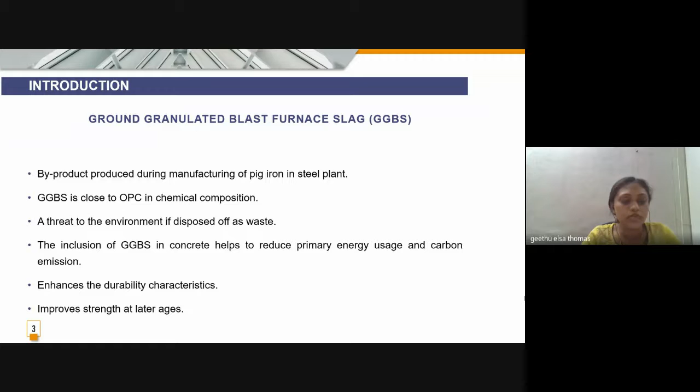It also enhances the durability characteristics, and it is found that it improves the strength at later ages.

Impact resistance is the ability of a material to withstand a high magnitude of force or shock applied to it over a short period of time. A force of larger magnitude over a short time has a greater effect than a force of smaller magnitude over a longer period of time.

Impact strength acts as a critical part in structures like bridges, harbors, crash barriers, fencing posts, curbs, etc. That is, areas which are prone to road accidents, also structures at the danger of blast loading or natural disasters.

Need for study: cement enterprises are one of the fundamental drivers of global warming, as they are the principal donors of carbon dioxide. It is the need of the hour to adopt a material that reduces the carbon emission and consumes less energy during production.

Usage of GGBS in conventional construction practices helps to reduce carbon dioxide emission, and it is also an effective utilization of industrial byproduct.

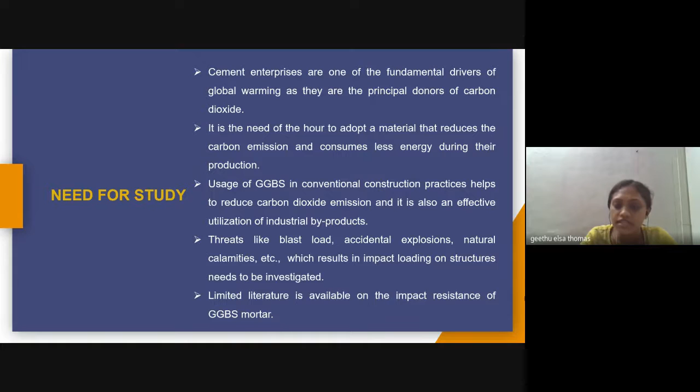Threats like blast loads, accidental explosions, natural calamities, etc., which result in impact loading on structures, need to be investigated. Limited literature is available on the impact resistance of GGBS mortar.

Objective: to identify the effect of addition of GGBS in improving the impact resistance in mortar mixes, to study the properties of materials and arrive at a suitable mix proportion, to identify an optimum mix, and to identify the microstructure of GGBS in mortar by conducting SEM analysis.

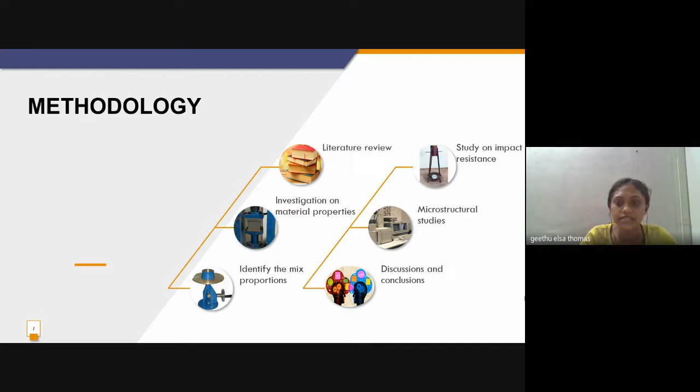Methodology: literature review, investigation on material properties, identify the mix proportions, study on impact resistance, microstructural studies, and discussions and conclusions. Material properties: cement, 53 grade ordinary Portland cement is used.

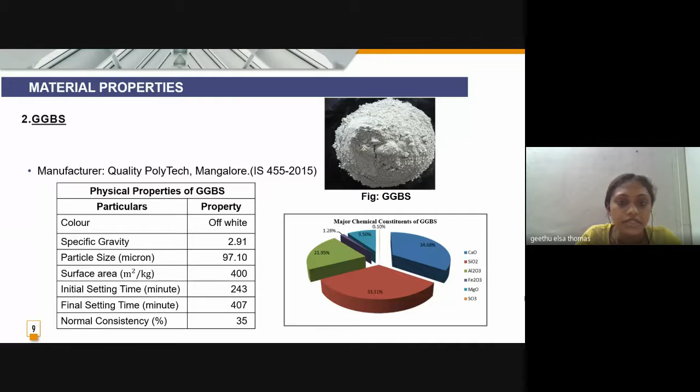The properties are tested and tabulated, and the chemical composition is shown in the figure. GGBS is bought from Quality Polytech Mangalore, and the properties as supplied by the supplier are shown here, and its composition is depicted. Then fine aggregate is used, M sand, which is collected from a local quarry in Calicut.

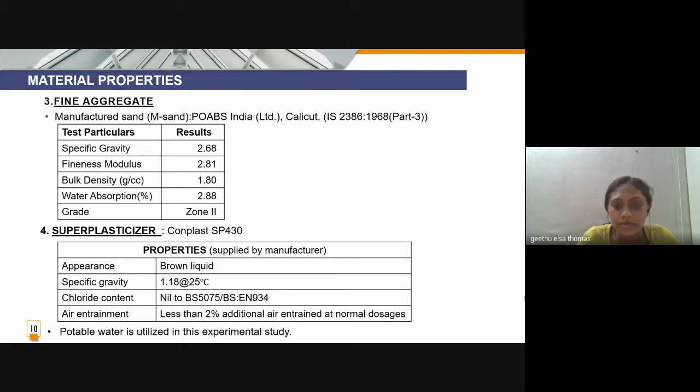The properties are tested in the lab, and it is found that it conforms to grade of zone 2. Then superplasticizer, Conplast SP430, is used in this study, and its properties as supplied by the manufacturer are tabulated. Also, potable water is utilized in this experimental study.

Mix proportions: guidelines for the preparation of mortar are according to IS 2250-1981. Proportioning is done using trial and error method depending on the parameters, namely amount and properties of binding materials, concentration of superplasticizer, and flow value.

A mix proportion of 1:1.5 is taken for this study, which is approximately equal to M20 grade that can be conventionally used as per the recommendations of IS 456-2000. A water cement ratio of 0.35 and superplasticizer content as 0.5% of binder is taken.

In this investigation, the cement was replaced with 20%, 30%, 40%, 50%, 60%, and 70% GGBS on a mass for mass basis. The amount of fine aggregate, water cement ratio, and superplasticizer were kept constant in all the mixes.

The table shows the notations for various proportions of the mix. For 0% GGBS, that is the reference specimen, it is depicted as OPC. Then for 20% replacement of cement it is depicted as G20. Similarly, for 30%, 40%, 50%, 60%, and 70% replacement, they are depicted as G30, G40, G50, G60, and G70 respectively.

Fresh properties like consistency, setting time, and workability are studied, and the results are tabulated. It is observed that consistency increases as percentage of GGBS content increases. Addition of GGBS does not significantly affect the setting mechanism. Workability increases as percentage of GGBS content increases.

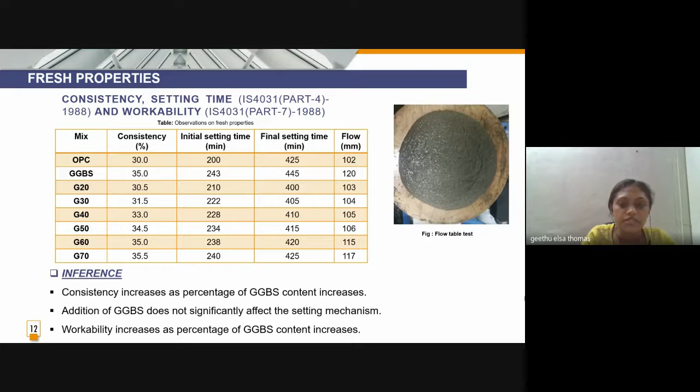A study on hardened properties is done to better understand the mechanical behavior of mortar after the inclusion of GGBS. Compressive strength tests, split tensile strength, and flexural tests are carried out on mortar, which are cured for 28 days in water. The results are tabulated.

It is observed that the result of the 28-day compressive strength test shows that addition of GGBS up to 50% provides strength almost equal to the OPC mix. Also, in general, there is a significant improvement in the flexural strength and split tensile strength with the addition of GGBS up to 50%, and it reduces thereafter.

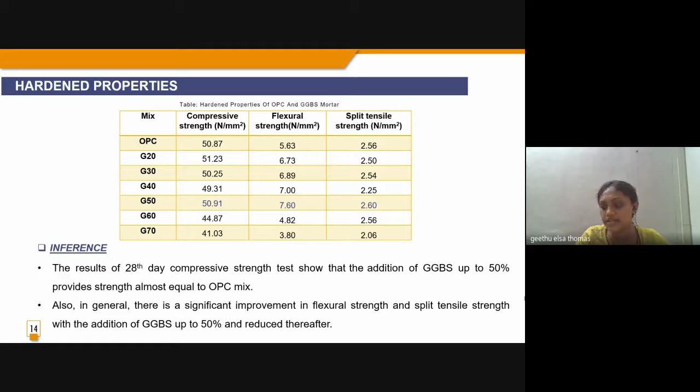This may be due to, from literature, the presence of unreacted GGBS acting as a filler material in the paste. Then, study on impact resistance.

Usually large scale missile impact tests are technically difficult and very costly. So we are focusing on small scale drop weight impact tests, which are done according to ACI recommendation 544.

It consists of a load of 4 kg, which is dropped from a height of 457 mm, making an impact energy of 17.93 joules per hit. Impact energy is determined using the equation E = N x m x g x h, where N is the number of blows at failure, m is the mass of the steel ball used, g is acceleration due to gravity, and h is the free fall height.

The number of blows causing the first crack and the number of blows at failure is taken from the test, and the results are tabulated.

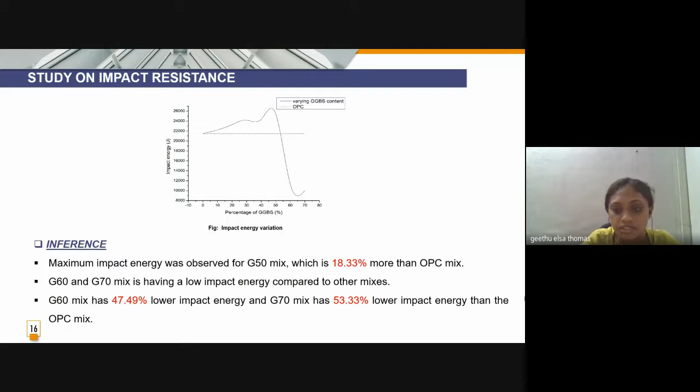G60 and G70 mixes have lower impact energy compared to other mixes. G60 mix has 47.49% lower impact energy, and G70 mix has 53.33% lower impact energy than the OPC mix.

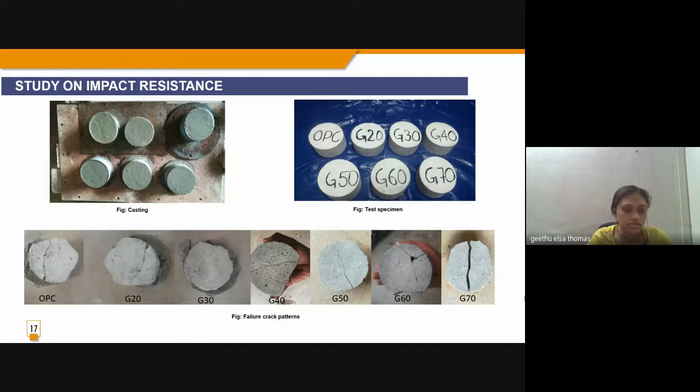These figures show the failure crack patterns. A brittle failure is found from the surface of the specimen, which breaks into two halves.

For microstructural studies, scanning electron microscopy technique is used, done according to ASTM C1723-16. The facility at STIC CUSAT, Kerala, is used to study the morphology of OPC mortar mix and G50 mortar mix. The specimens, after 28 days curing, are taken for SEM analysis.

These are the images obtained for the OPC mix and the G50 mix respectively. Here the notation A denotes the pores, B denotes unreacted or partially reacted slag, C denotes the smooth surfaces, and D denotes the air voids.

It is observed that the SEM image for the G50 mix shows more smooth surfaces, indicating the fineness of GGBS, while more pores are identified in the OPC mix. Thus, the finer GGBS particles combine with the greater cement particles, enhancing the mechanical properties of the mortar.

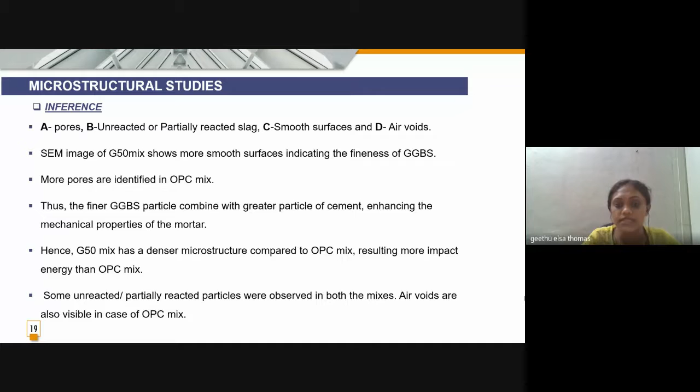The G50 mix has a denser microstructure compared to the OPC mix, resulting in more impact energy than the OPC mix. Some unreacted, partially reacted particles were also observed in both mixes, and air voids are also visible in the case of the OPC mix.

Conclusions: this study is an experimental investigation on the impact resistance of GGBS mortar. Studies on the impact resistance of GGBS mortar show that GGBS can be effectively utilized as a raw material in structures like railway sleepers, crash barriers, fencing posts, curbs, etc., which are mostly subjected to impact loadings.

From the test results, the following conclusions are made: the inclusion of GGBS in mortar improves the mechanical properties significantly. The inclusion of GGBS up to 50% improves the impact energy by 18.33% when compared to OPC mortar.

SEM analysis shows that the G50 mix has a less porous structure and more smooth surfaces, indicating a denser microstructure. The studies on the hardened properties indicate that the G50 mix can be taken as the optimum mix.

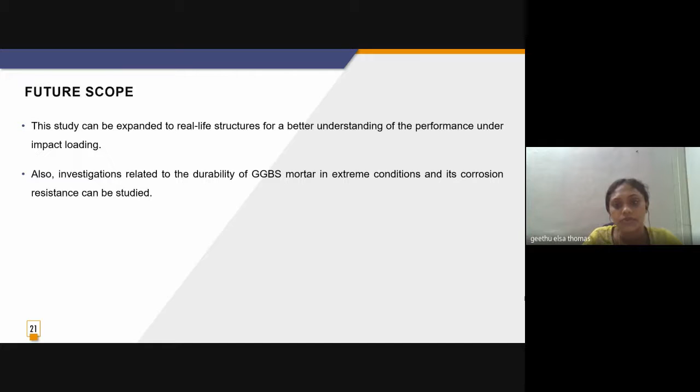Future scope: this study can be expanded to real-life structures for a better understanding of performance under impact loading. Also, investigation related to the durability of GGBS mortar in extreme conditions and its corrosion resistance can be studied.

Coming to the introduction part - if we talk about Portland cement, the manufacturing process of Portland cement requires about 1400 to 1500 degrees Celsius temperature. With this amount of temperature and this manufacturing process, a lot of harmful gases are emitted into the environment, which leads to degradation of the environment.

Whereas if we talk about low-grade limestone, it needs only 900 degrees Celsius of temperature for its calcination. With this temperature, low-grade limestone attains the pozzolanic property, and also with this temperature we can have lesser emission of harmful gases. So low-grade limestone is the alternate in the cement industry, which should be used as an SCM.

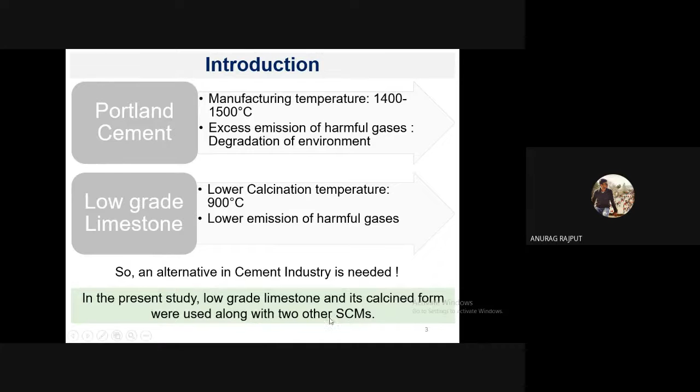So in my present research work, I have used the low-grade limestone and its calcined form, along with two other SCMs - silica fume and fly ash. Then, what is the need of this study? Actually, we can have our limestone from the waste.

What are the objectives of this research work? The main objective is to produce low-grade calcined limestone by heating the uncalcined limestone at a temperature of about 900 degrees Celsius for about 1 hour, and to determine the optimum dosage of these two, uncalcined and calcined limestone, which can enhance the properties of mortar. We also have to use it to the maximum so that...

...open landfill dumping should be minimized. We have to compare the properties of control mortar with the composite cement mortar. After all these things, we can arrive at a final mix of mortar which can enhance all the properties.

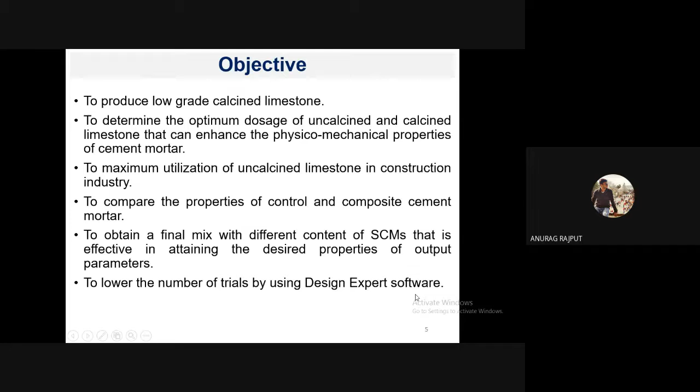By the use of Design Expert software, we have reduced the number of experiments, because we have 5 input variables: calcined limestone, fly ash, uncalcined limestone, silica fume, and super plasticizer. If we make a combination, we can have 243 mixes, but with the help of Design Expert software, we reduced these mixes to 46. So the number of trials is reduced.

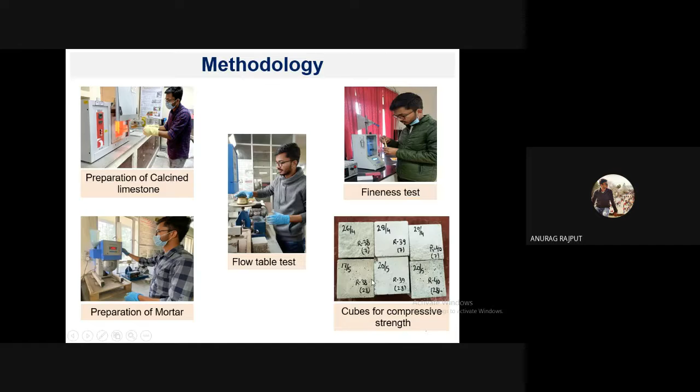Coming to the results and discussion part, first of all, these are the SCMs that I used: FA stands for fly ash, UCLS stands for uncalcined limestone, CLS stands for calcined limestone, and SF stands for silica fume. The replacement levels of these input variables are as follows.

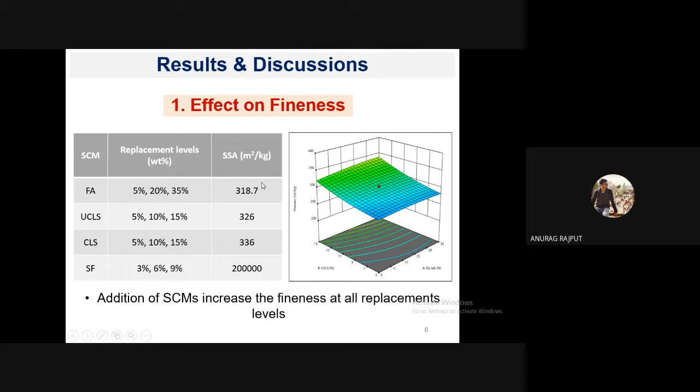I conducted a fineness test, and these are the fineness values of each SCM. I concluded that with the use of these SCMs, the fineness of the composite cement was increased, because the fineness of all the SCMs is very high as compared to OPC. So the resultant effect is increased fineness.

If we talk about consistency, all the SCMs increase the consistency. For silica fume and calcined limestone, at every replacement level, the consistency was increased. But for fly ash, uncalcined limestone, and super plasticizer, only a dosage of 5% fly ash, 5% uncalcined limestone, and 0.5% super plasticizer results in increased consistency. If we increase the dosage of these input variables further, consistency declines. So these are the only dosages which can enhance the consistency.

If we talk about setting time, it is increased with the inclusion of these dosages: 35% fly ash, 5% uncalcined limestone, 15% calcined limestone, 6% silica fume, and 0.5% super plasticizer, which leads to a retardation of setting time by about 30% as compared to the control mortar. And if we need acceleration in setting time, for areas where we want the mortar to set quickly, then these are the dosages of the input variables required.

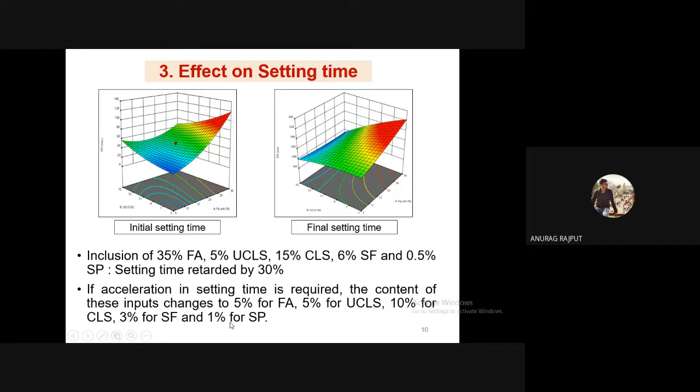We can reduce the fly ash to 5%, and uncalcined limestone is at the same level, 5%, and calcined limestone reduced to 10%, silica fume reduced to 3%, and SP increased to 1%. So this is the replacement level if we want acceleration of the setting time.

If we talk about compressive strength, we know that with the addition of fly ash, 28 day compressive strength decreases. So a very lower level of fly ash was used here, with uncalcined limestone at 5%, and 15% of calcined limestone—this is the maximum usage of calcined limestone we have used—along with 9% silica fume and 0.5% superplasticizer, increasing the 28 day compressive strength by about 62% as compared to control mortar.

And this is the mix by which we can reduce the clinker factor to 0.66, which is effective. So we have reduced the clinker factor using this mixture.

After that, I optimized the process. So these are the input variables.

Lower limit was fly ash at 5% and upper limit was 35%. Similarly for uncalcined limestone, lower limit of 5% and upper limit of 15%. Same for calcined limestone. Silica fume had a lower limit of 3% and upper limit of 9%. SP had a lower limit of 0.5% and upper limit of 1.5%.

So we optimized these outputs. We want fineness in the range of 300 to 500, consistency in the range of 30 to 36, initial setting time in the range of 30 to 120, final setting time in the range of 200 to 600 minutes, and 28 day compressive strength in the range of 43 to 65.

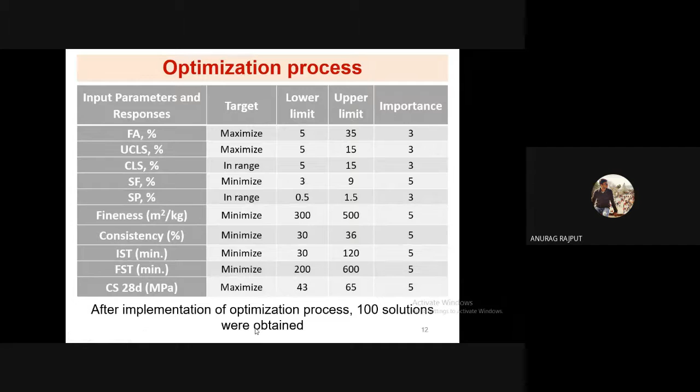Out of these 100 solutions, we have one best solution with the maximum desirability of 0.927, which is very close to 1.

So this is the mix which can enhance all the properties: 4.25% fly ash, 6.14% uncalcined limestone, 15% calcined limestone, 5.84% silica fume, and 1% superplasticizer. We can see that these dosages are quite different from what we input in the software.

After having this mix, we performed the experiments again, and these are the optimized values obtained from the results. These are the experimental values from performing the experiment, and they are very close to the optimized values, so the error was very small.

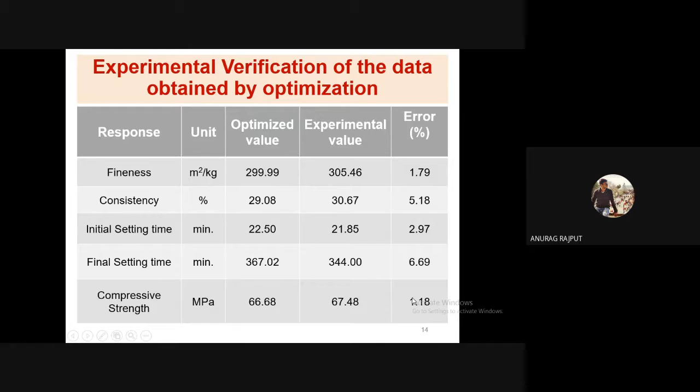Concluding this, we can say that if we use low grade limestone along with OPC and other supplementary cementitious materials, we can enhance the properties as compared to OPC. This is a better eco-friendly option compared to OPC, as I mentioned in the first slide. We obtained the exact replacement levels after optimization, which can enhance all the properties. Calcination imparts positive properties to limestone, and the clinker factor was reduced to 0.66, which is very beneficial.

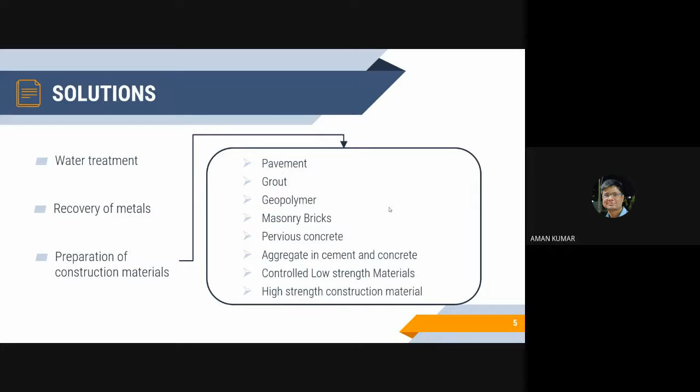To deal with these issues, there have been many attempts to reuse red mud, mainly categorized into water treatment, recovery of metals, and preparation of construction materials. Many studies have examined using red mud as a substitute for ordinary Portland cement for production of grout, pavement, geopolymer, etc. This review analyzes the leaching and heavy metal binding characteristics of these geopolymers and alkali activated binders. The leaching of these samples was examined by toxicity leaching procedures, which also helped identify the primary cause of efflorescence. At the same time, chemical speciation pointed out the leaching of heavy metals from the samples under consideration.

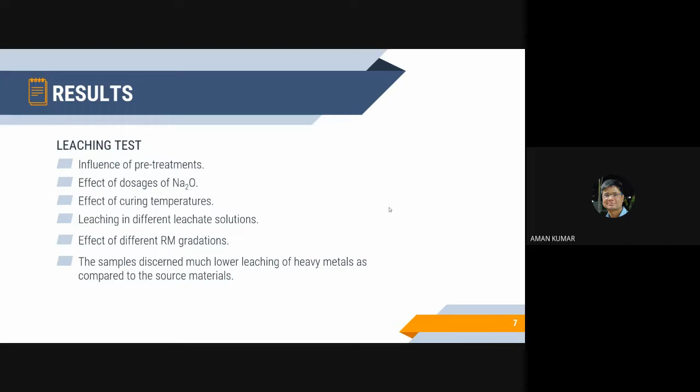Effects of a number of parameters were analyzed, such as various pre-treatments provided to the geopolymer samples, the effect of dosage of alkali activator, the effect of curing temperature, etc. The studies reported a heavy metal leaching concentration lower than that prescribed by the United States Environmental Protection Agency, the US EPA. Moreover, leaching of heavy metals from the prepared samples was lower than the corresponding source materials. The heavy metals in the geopolymer were in the oxidizable and residual fractions, which were more stable. Hence, the red mud geopolymer mixture was speculated to be a safe alternative to cement composites.

Leaching tests were performed to evaluate the activity of Al2O3 and SiO2 with varying calcination temperature and Na2O dosage. It was noted that the dissolution efficiency reached a peak for both compounds at a calcination temperature of 800 degrees Celsius and decreased when the temperature was further increased.

The dissolution efficiency kept on rising with the addition of more Na2O. However, a higher dosage impeded the workability of the mix. Therefore, a balance is required for its optimum utilization for a certain application.

Leaching tests were conducted before and after the efflorescence test to understand the mechanism of formation of efflorescence. It was observed that the primary cause of efflorescence in the red mud containing sample was due to the amount of sodium ion present in it, although the extent of leaching was less in the geopolymer samples compared to samples prepared using Portland cement.

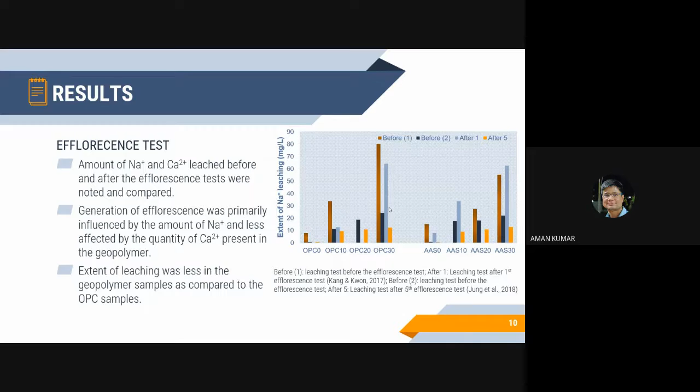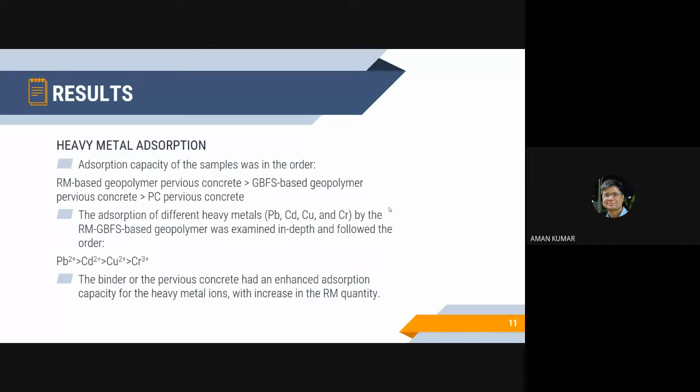This property of the geopolymer pointed out its potential use for the design of pervious concrete, which could function as a water purifier. To conclude, there is an urgency to find an alternative way to use the pernicious red mud instead of the conventional way of disposal.

The study also indicates that the leaching and heavy metal binding characteristics of geopolymers and alkali activated binders were better than the samples prepared using OPC, suggesting that red mud can be a possible substitute for the same. Although, in order to do so, there is a need for regulations, and further research is needed on the corrosion of reinforcement, bond behavior, and structural behavior of reinforced geopolymer if it is required for higher strength.

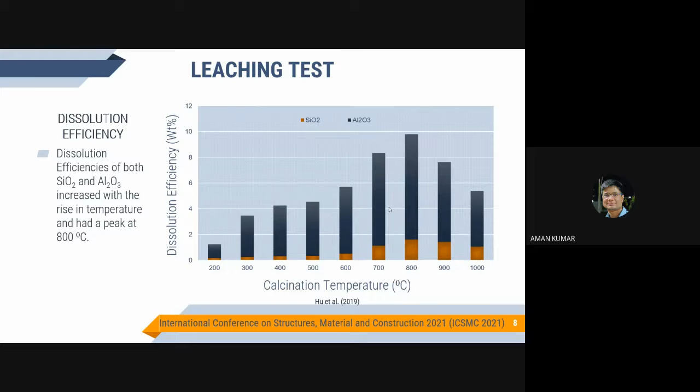There's a suggestion from my side: club this into your review paper for the future. Try to compare red mud with the properties of calcined clays or limestone calcined clay systems. Then you will get a clear comprehensive difference, and when comparing, you can tell which one is better, so researchers won't get confused about using red mud or calcined clays, because nowadays BIS specifications have come for limestone calcined clay cement also. Are you aware of that? No sir, I wasn't aware. BIS specifications for limestone calcined clay cements have come. So whenever you are focusing on something, focus on similar products or materials and compare them among themselves. That will give a more comprehensive view of how that material differs from materials of the same family.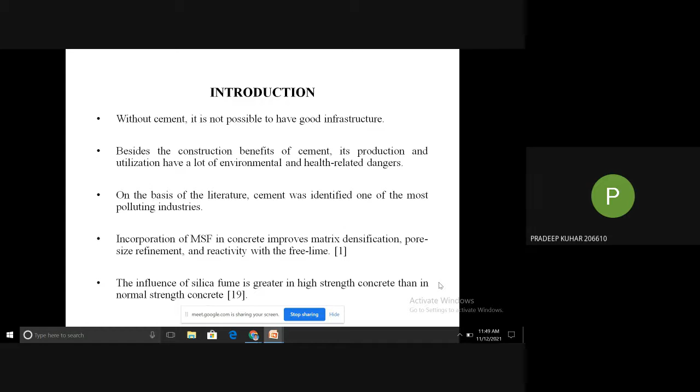Silica fume is made up of very small particles of size about 0.1 micron, about 100 times finer than cement, and possesses high pozzolanic reactivity. Some more works also find that silica fume helps in better bonding by producing more calcium silicate hydrate gel with a decrement in void content, ultimately enhancing durability.

From the study of literature, there is a lot of uncertainty about the replacement amount of silica fume with that of cement.

So here are some objectives of my study. My objective is to identify a suitable replacing material which proves to be sustainable, and also to determine its optimum replacement amount with that of cement. But all this should be without compromising the requisite properties of the concrete mix, that is, the strength parameters and durability parameters.

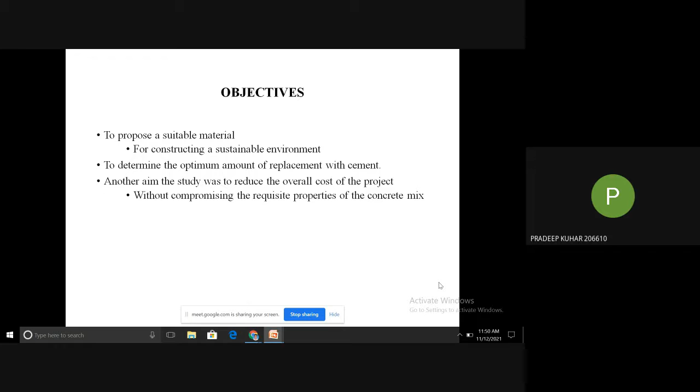These are the materials I used in the study: OPC 43 grade cement manufactured by Ultratech Cement. I collected locally available coarse aggregate and fine aggregate, with maximum size of coarse aggregate used being 20 mm, and commercially available silica fume with specific gravity 2.2 and specific area 1800000 centimeters square per gram.

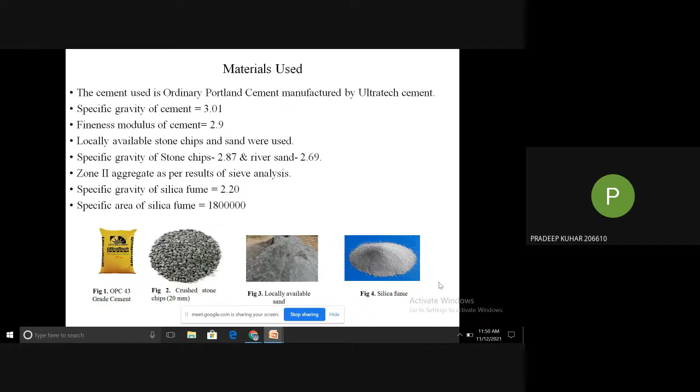I will talk about the methodology part of the study. First, I collected all the constituents of the concrete mix. Then I designed the mix design as per the IS code, that is 10262:2019.

This is the concrete mix Indian standard code, and then finally I casted the specimens, that is cubes, cylinders and beams. All specimens were cured for the required number of days. I tested some specimens at 7 days of curing, some at 14 days, and some at 28 days. After the required curing period, I tested the specimens for compressive strength, tensile strength, and flexural strength respectively.

Thereafter, I tested the cubes for compressive strength, and the outcome showed an improvement in the compressive strength. With the addition of silica fume in the concrete, the optimum amount was figured out as 9.5% replacement of silica fume, that is, MX3 specimens showed the highest compressive strength.

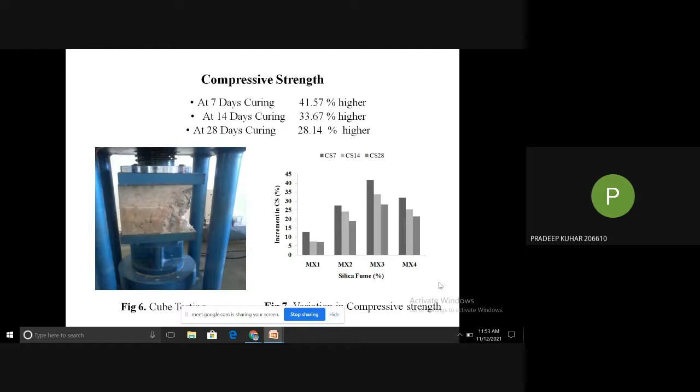Similarly, the split tensile strength had also increased by 34.42% at 7 days of curing, then after 14 days of curing it was about 29.19%, and at 28 days it was about 23.18% higher than that of the normal grade concrete, that is MX0 specimens.

In the same way, flexural strength has also increased about 45.41% at 7 days, 33.48% at 14 days, and 25.80% at 28 days.

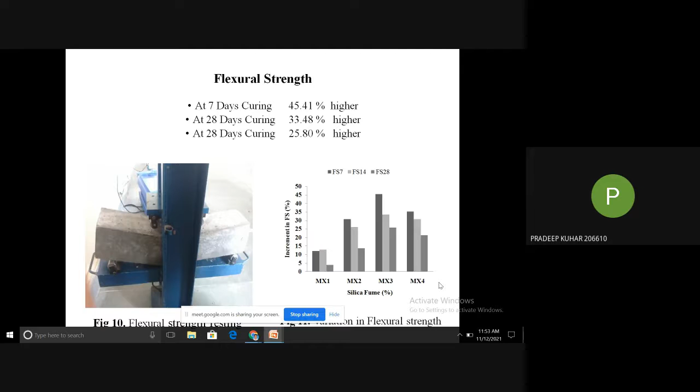After that, I also observed that the MX3 specimens had achieved the target strength of the next higher grade concrete. I had designed all the specimens for M35 grade concrete, but MX3 specimens with 9.5% replacement of silica fume with cement had achieved the target strength of M40 design mix grade concrete at 28 days of curing.

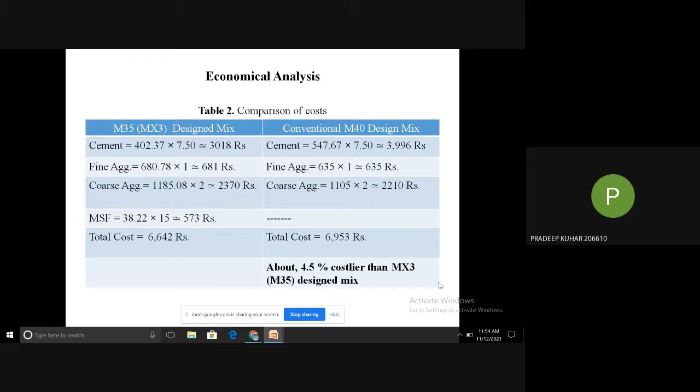Then I compared the economical aspects, that is M35 design mix in which I had used silica fume, and another conventional M40 design mix. In continuation, that economic analysis found that MX3 design mix proves to be about 4.5% more cost effective than the conventional M40 design mix specimens.

So coming to the conclusion and discussion part of this study, it can be said that with the addition of silica fume in concrete, homogeneity gets enhanced, but there is a reduction in workability. So we can use superplasticizers to overcome these additional water requirements.

Further, it was noted that specimens prepared using microsilica fume have better resistance against chemical attack when placed in 5% dilute hydrochloric acid solutions for a period of 30 days. And there is an enhancement in the concrete strengths, whether it is compressive strength, flexural strength, or split tensile strength.

Meanwhile, we are consuming less amount of cement, therefore we are minimizing the carbon footprint also. And the optimum replacement amount was found to be around 9.5%.

Now it is evident that there is better hydration of cement particles, and the formation of additional calcium silicate hydrate gel makes the concrete more dense, which leads to a reduction in permeability and enhancement in durability. And high value of early strength

shows good indication from a contractor as well as owner profit point of view, so that they can certainly speed up the construction of the structures.

Here are some future scopes of the study: in the near future we can add other materials into the concrete, other byproducts of the industries.

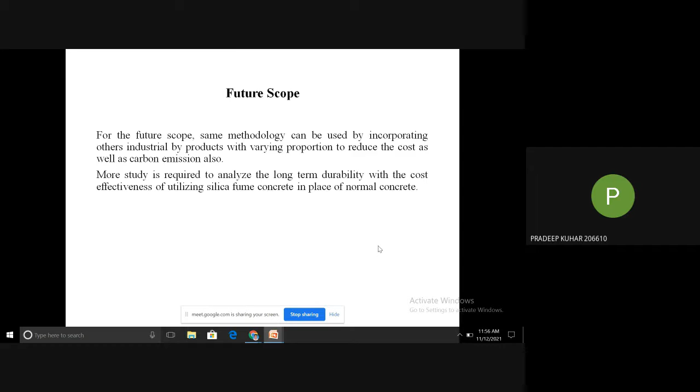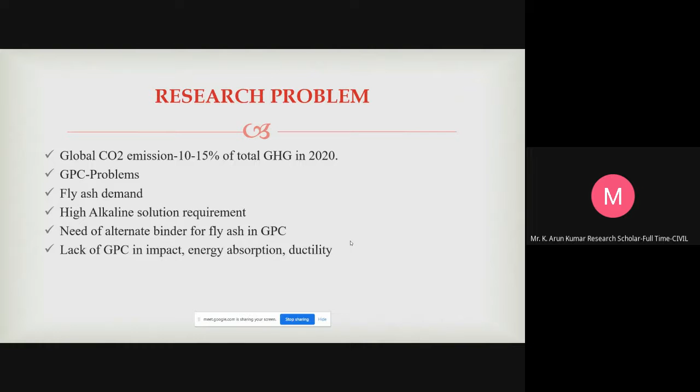Also, in GPC there is a lack of impact and energy absorption and ductility behavior. So GPC has some problems in its properties, and we want to address these problems. For that we are adding fibers, that is polypropylene fiber. Okay, so this is my research problem.

So in my abstract, I explain why I am choosing waste wood ash, what it is, and how I am going to replace fly ash with wood ash in my research. I am taking 0 to 100% replacement of fly ash with wood ash at 10% increments, and I have moved on to optimization of the fly ash and wood ash ratio.

While choosing wood ash, I noted that wood ash has a chemical composition containing potassium. For GPC we use an alkaline solution, which is sodium hydroxide and sodium silicate. So we have chosen that potassium, K2O, can act as an alkaline solution.

So we have noted that waste wood ash has potassium. So while our research moved on to the next journal, we found we can reduce the quantity of alkaline solutions. We optimized the molarity, we optimized the AB ratio, that is solution to binder ratio, and then we optimized the wood ash to fly ash ratio. After that we added polypropylene fiber from 0 to 2%. We have chosen that percentage limit, 0 to 2%, because while referring to journals, we noted that fiber addition should be limited to 2%. So we chose 0 to 2% with 0.5% increments. So this is our abstract.

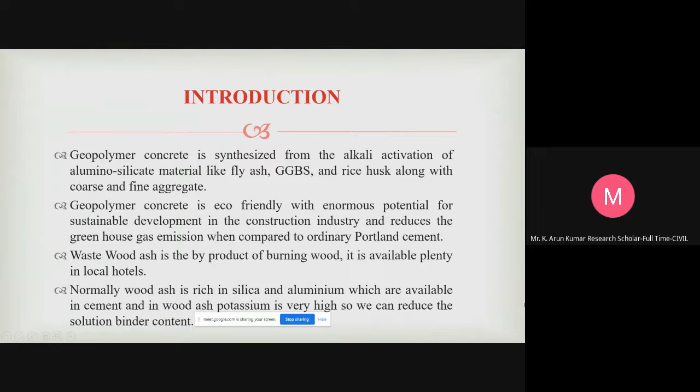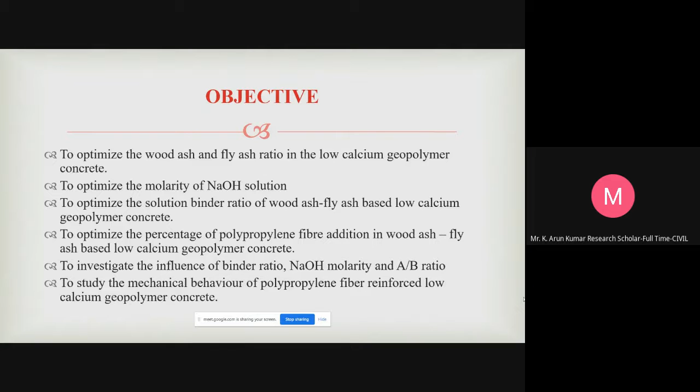My objective is to optimize the wood ash and fly ash ratio in the low calcium geopolymer concrete, and then optimize the molarity of the alkaline solution. Then optimize the solution to binder ratio. Then optimize the percentage of polypropylene fiber addition. Then find the influence of the material, that is wood ash, molarity, and AB ratio. And I have to find out the mechanical properties of polypropylene fiber reinforced geopolymer concrete. So this is my objective.

Why I'm choosing this study: it is to find a solution to reduce the greenhouse gas emissions from cement production, and to utilize waste industrial byproducts that are plentiful in the environment. So we have to dispose of the waste into an innovative product - that is my main aim of this study.

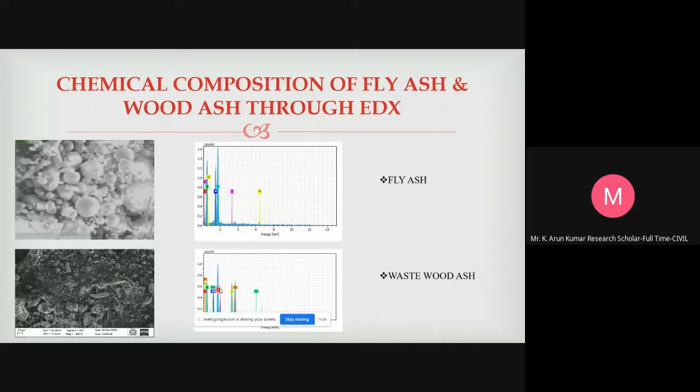Now these are the materials I have used, and these are the material properties I will go through. This is the chemical composition of fly ash and wood ash through EDX. By this we found that waste wood ash has potassium, that is K. Here it is here. So we found that K is available in the waste ash, so we can use that K.

So the optimization of binder replacement of wood ash by 0, 10, 20, 30, 40, 50, 60, 70, 80, 90, and 100, by fixing constant 13 molarity of NaOH and 0.61 AB ratio. After optimizing this binder ratio, we moved on to the optimization of NaOH molarity, done by 8, 9, 10, 11, 12, 13, and 14, by fixing the constant AB ratio of 0.61. Then we moved on to the optimization of AB ratio, by 0.45, 0.5, 0.55, 0.6, and 0.61. After optimizing all these, we moved on to the optimization of fiber.

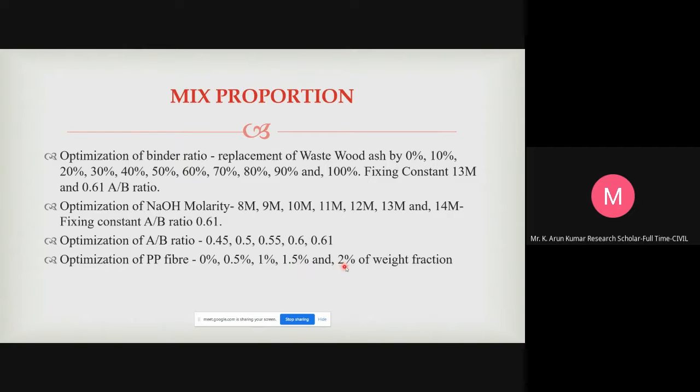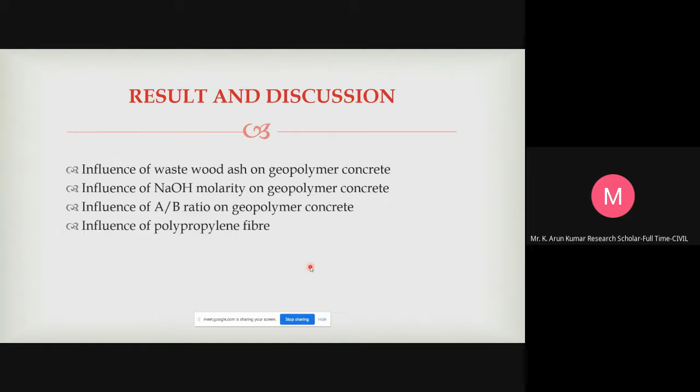The results and discussion comprise 4 parts: influence of waste wood ash on geopolymer concrete, influence of NaOH molarity on geopolymer concrete, influence of AB ratio, and influence of polypropylene fiber. Regarding the influence of waste wood ash on geopolymer concrete, we found that 30% addition of waste wood ash has been the optimum percentage, observed to give maximum performance in all strength characteristics like compressive and tensile strength.

The optimum mix, the 30% mix, has attained a maximum compressive strength of 22.87 MPa at 3 days, 27.73 MPa at 7 days, and 37.92 MPa at 28 days. So we designed for M30 mix, but by the addition of wood dust, we achieved 37.92 MPa at 28 days.

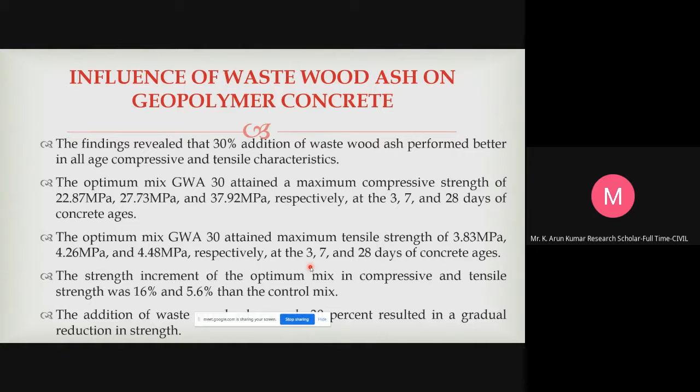Moving on to the influence of NaOH molarity, the strength increased with increasing molarity, as inferred from previous literature and confirmed in our own results. The findings also show that the strength increment continued up to 13 molarity, that is, from 8 to 13 molarity the strength increased. After that, beyond 13 molarity, the strength started decreasing. However, considering the cost overview and the use of waste wood ash as a potential alternative,

there was a need to reduce the quantity of alkaline solution and find alternate alkaline activators. For this, the 10 molarity NaOH mix obtained 34.51 MPa, which is more than the characteristic compressive strength. So the 10 molarity NaOH could achieve 100% of strength after 28 days. Hence, we chose 10 molarity for our study going forward.

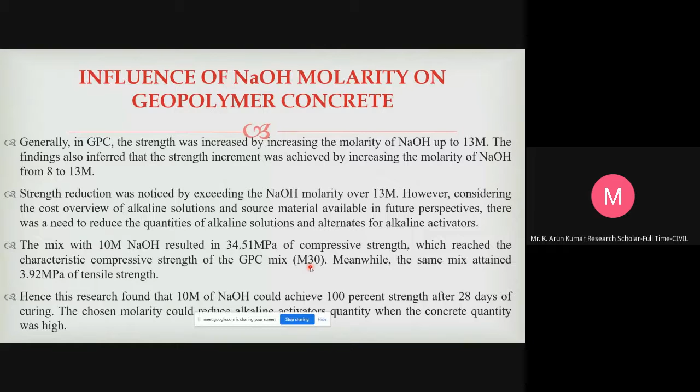So this is the test results of different molarities. Then we moved on to the influence of the alkaline solution to binder ratio, where the strength increased with increasing A/B ratio. Based on the mix design, the A/B ratio of 0.61 gave the maximum performance in all strength characteristics compared to the other ratios.

However, as mentioned earlier, reducing the usage of alkaline solution in GPC is important. The mix with the 0.545 ratio attained a strength of 32.9 MPa, which is more than the characteristic compressive strength. Hence, we found that a 0.545 ratio could be enough to achieve 100% of strength after 28 days of curing, helping reduce the quantity of alkaline solution.

So this is the test results of compressive and tensile strength with different A/B ratios. We optimized three parameters: the percentage of waste wood ash, the molarity of NaOH solution, and the A/B ratio.

Now we move on to the optimization of fiber content, that is, polypropylene fiber, in the geopolymer concrete. We chose 0.5%, 1%, 1.5%, and 2% of PP fiber.

The maximum compressive strength of 24.49 MPa, 29.95 MPa, and 42.9 MPa was achieved with the addition of 1% PP fiber, with strength increments of 61%, 47%, and 22% compared to the control mix. This increment was due to the high degree of compressibility of PP fiber, and these findings correlated with previous studies.

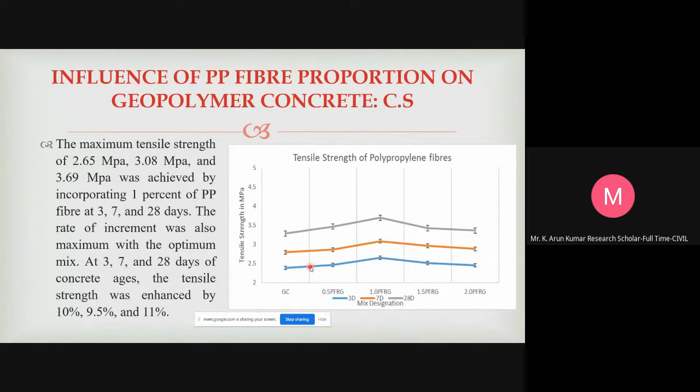Similarly, for tensile strength, the maximum was observed with 1% addition: 2.6 MPa at 3 days, 3.08 MPa at 7 days, and 3.69 MPa at 28 days, with strength increment percentages of 10%, 9.5%, and 11% respectively.

By the same method, the flexural strength was also optimum at 1% fiber addition: 3.58 MPa at 3 days, 4.28 MPa at 7 days, and 4.8 MPa at 28 days, with strength increments of 8%, 10.75%, and 12% on the respective days.

Coming to the conclusion, in the optimization of wood ash, we found that 30% replacement was optimum, and increasing the wood ash replacement beyond 30% led to a decrement in strength. Hence, we took 30% as the optimal replacement of waste wood ash.

For the optimization of NaOH molarity, we noted that the strength increment continued up to 13 molarity, and after that the strength started decreasing. Also, at 10 molarity, the NaOH mix achieved 100% of compressive strength.

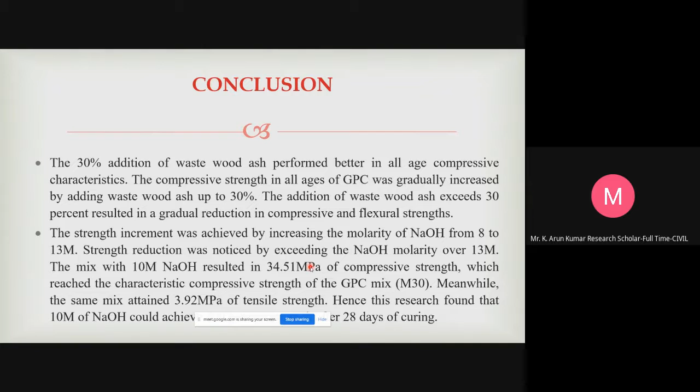Hence, we can choose 10 molarity NaOH as the optimum NaOH molarity for the future study. Then, for the same method of optimization of A/B ratio, we have taken 0.545 as the A/B ratio because it achieved 100% of strength in the 28 days compressive strength. Hence, we can take 0.54 ratio in favor of reducing the quantity of alkaline solution.

Finally, in the optimization of polypropylene fiber, 1% of fiber has obtained the optimum strength. The 1% addition of fiber can improve the compressive, tensile, and flexural strength by 61%, 11%, and 12% respectively. Beyond 1% addition of fiber, the strength reduces in all strength characteristics. Hence, 1% can be chosen as optimum.

So beyond that, I conclude that 30% would achieve better performance and gradual increment. The objective of the study has been proved that 30% waste wood ash can be used as an alternate for fly ash, which can help reduce the quantity of alkaline solution as well as the demand for fly ash and the drawbacks of fly ash based geopolymer concrete. Thank you. So, queries are welcome.

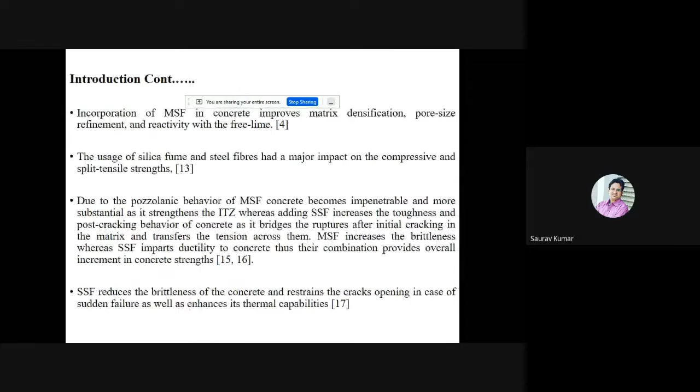In this, I will discuss some literature in the introduction section. After that, I will talk about the need of the study with specified objectives. Then we will have a discussion on the materials, the methodology, and the results obtained. And last but not least, the future scope of the study.

As we all know, the most consumable material on earth after water is concrete. In making concrete, cement is consumed in large amounts, and it is impossible to have good infrastructure without cement. But it is also evident that it endangers human health as well as the environment.

Literature also identifies cement as one of the most polluting industries, and in the past, lots of research has been done on different alternatives to cement by partially or fully replacing cement with other materials.

Later, in 2011, Siddique R. found that MSF, which stands for microsilica fume, improves the reactivity with free lime and improves the cement-aggregate matrix densification. Whereas a study by Köksal et al.

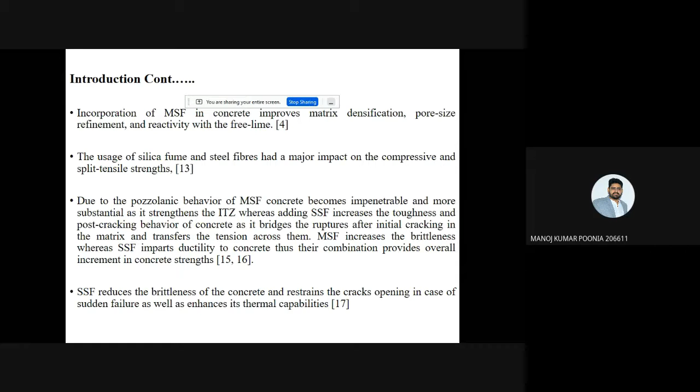in 2008 found that silica fume with the addition of steel fiber has a good impact on mechanical properties of concrete. Some more works in the past also found that microsilica fume enhances densification of concrete, and steel fibers decrease brittleness, thereby preventing sudden failure as well as enhancing thermal capabilities.

So, in continuation of past research work, my motivation behind this research is to validate a good alternative to cement from industrial byproducts, which is not only beneficial for the environment but also proves economical as per cost parameters.

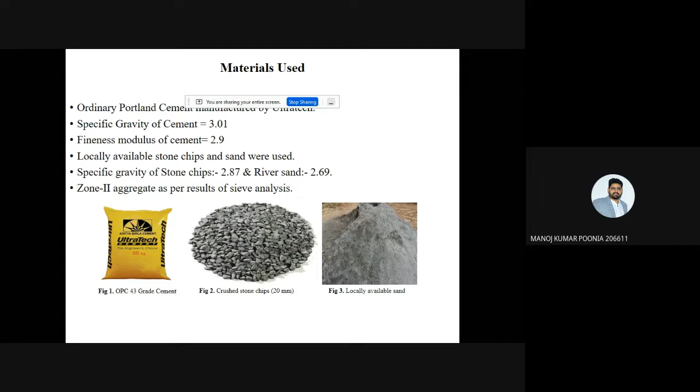To achieve the objectives, the following materials have been used: first, OPC 43 grade cement from Ultratech Cement Company, locally available coarse and fine aggregates, commercially available microsilica fume, and steel fibers with the following parameters - stainless steel fibers with an aspect ratio of 80, that is L by D, chosen with a length of 40 mm and diameter of 0.5 mm.

In the experimental program, first we designed the concrete mix as per Indian Standard Code IS 10262-2019, and calculated the amount of constituents of the concrete, and finally cast the specimens: cubes of size 150x150x150 mm, cylinders of size 150x300 mm, and beams of size 150x150x700 mm.

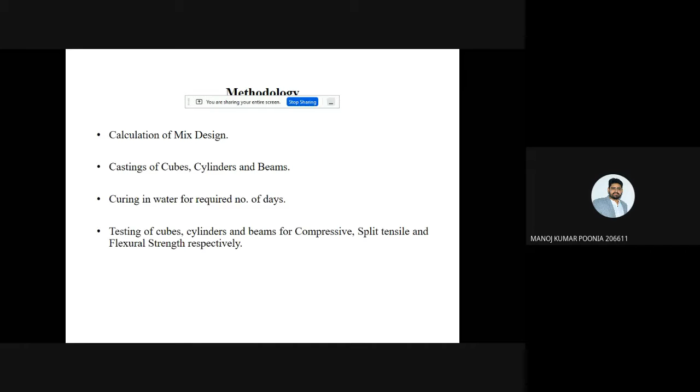M0S0 is normal concrete, where we do not use any admixtures like silica fume or steel fibers. In the case of design mix M1S1, it contains 3% MSF as a replacement of cement by weight, and 0.7% steel fibers by volume of concrete.

In the case of M2S2 design mix, MSF replaced 6% of cement's weight, and SSF replaced 1.4% by volume of concrete. In the case of M3S3 design mix, MSF was 9% by weight of cement, and SSF was 2.1% by volume of concrete.

In the case of M4S4 design mix, MSF of 12% by weight of cement and SSF of 2.8% by volume of concrete has been used.

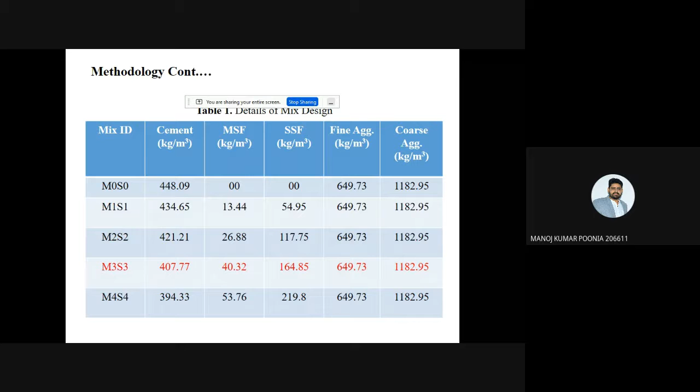The results of the compressive strength test show a remarkable combined effect of silica fume and steel fibers on the concrete. We got maximum strength in the case of M3S3 design mix specimens, in which we used 9% silica fume as a replacement of cement, and 2.1% steel fibers added by volume of concrete, and got 41.22% higher strength at 7 days curing and 26.45% higher at 28 days curing as compared to conventional concrete.

In the case of split tensile strength, a similar increment was found.

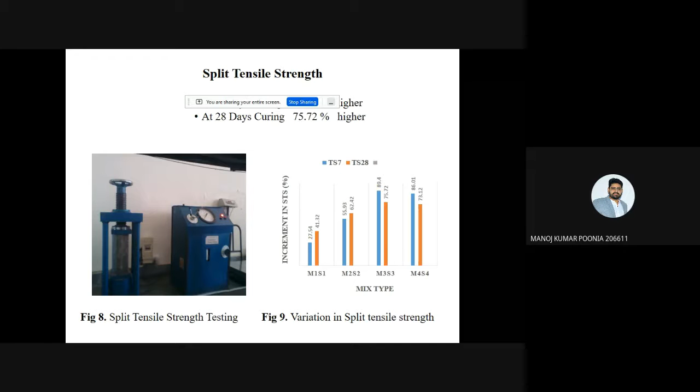At 7 days, it was 89.4% higher, and at 28 days of curing it was found to be 75.72% higher. In the same way, flexural strength was also enhanced; at 28 days it was found to be 86.49% higher.

By clearly monitoring the results, it was observed that M3S3 specimens achieved the target strength of higher grade concrete, that is M40. After that, an economical analysis was made between M3S3 design mix and conventional M40 design mix, and it was found that we can save about 2.4% cost if we use M30 designed mix as M3S3 in place of conventional M40 design mix.

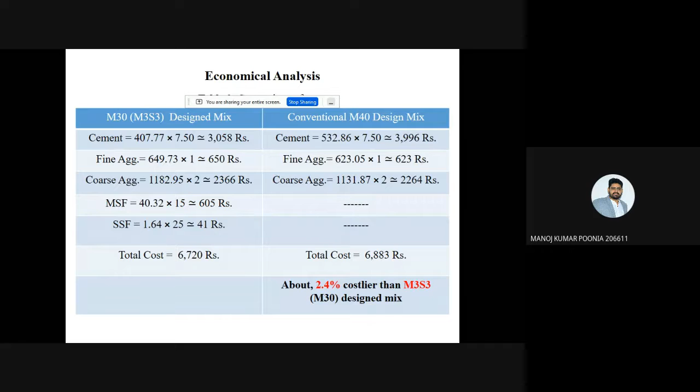Now, if we talk about the hardened properties, that is mechanical strength of the concrete, results had shown that there is a remarkable enhancement in all the strengths, whether it is compressive strength, split tensile strength, and flexural strength. It was also found that the optimum amount of cement replacement by silica fume was 9%.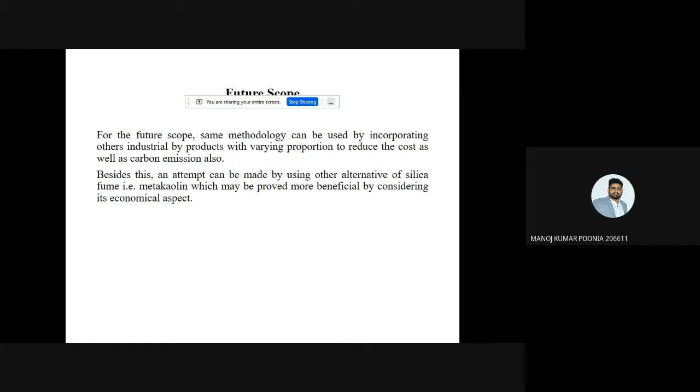And at last, it is the future scope of the study, incorporating other industrial byproducts which reduce the cost as well as carbon emission, because it is the need of all research nowadays. Besides this, an attempt is made to consider other alternatives to silica fume, such as metakaolin, which may prove more beneficial considering its economical aspects.

And these are my references which I had used for the research.

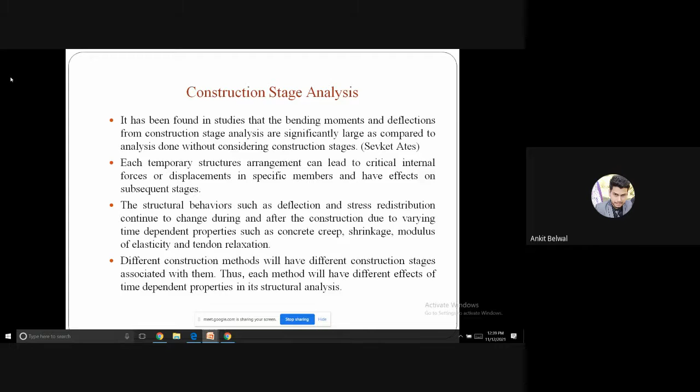Also, structure behaviors such as deflection and stress redistribution continue to change during and after construction due to varying time-dependent properties of concrete such as creep, shrinkage, and modulus of elasticity, and also the relaxation of tendons. As different construction methods have different construction stages associated with them, each method will involve different types of construction stages, loads, and time-dependent properties.

Therefore, the objective of this study is to compare the effect of construction stages on the structural behavior of pre-stressed concrete box girder bridges constructed using the balanced cantilever method and the full staging method, and thus to determine the more efficient method among the two based on the analysis results.

Now, talking about the example bridge, you can see the line diagram and 3D view of the bridge model taken as an example. The bridge is a 3-span continuous cast-in-place box bridge having a main span length of 130 meters and 2 side spans of 85 meters each, constituting a total bridge length of 300 meters. The width of the bridge is 12.7 meters, accommodating 2 lanes.

The whole structure system of the bridge consists of a continuous bridge deck, 2 intermediate piers, and 2 end abutments. Each intermediate pier consists of 2 piers of height 40 meters with 4.3 meter center-to-center spacing. Midas Civil software has been used for modeling the bridge in this study.

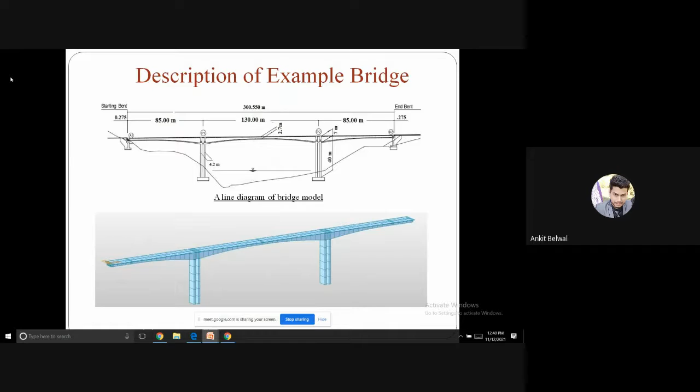Now, talking about the construction stages involved in balanced cantilever method, the bridge is constructed in a number of stages, constituting erection of piers, cables, and deck segments. This method has been preferred over other methods as it does not require any scaffolding.

In the earliest stage of this method, piers have been constructed and formwork and scaffoldings are arranged for pier table construction. In the next stage, formwork traveler is positioned to cast segments on both sides of the pier. That is why it is called a balanced cantilever method, because we construct cantilevers on both sides of the piers.

After that, the formwork traveler is installed in this recently casted segment and positioned to carry formwork for the new segment. This process is repeated and all segments are casted one after another. After this, at the last construction stage, the mid-span cantilevers and side spans are joined together using key segments.

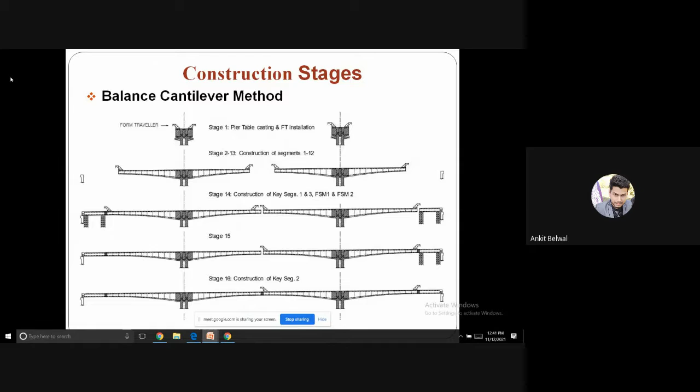And to take account of time-dependent analysis due to creep, the last stage is given a duration of 10,000 days so as to check the long-term effect of creep strains.

Now, if we talk about the construction stages involved in full staging method, it is basically a traditional method of constructing bridges, which involves the use of proper false work arrangements for casting bridge deck, piers, and other structural components. As the length of the continuous tendons have some limits, which will therefore be handled with the construction joints.

Thus, in this case, construction stages have been considered based on these construction joints. The construction joint is provided after the completion of each span. Thus, all the three spans are constructed sequentially on their respective construction stage.

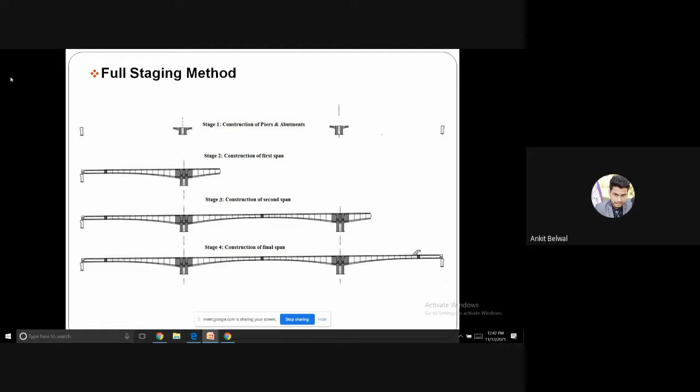Now, the next graph shows the variation of shear force along the bridge span for both the methods. There is not much significant difference observed in the maximum positive and negative values of shear force in both the cases. But in comparison, balanced cantilever method has lesser values of shear force.

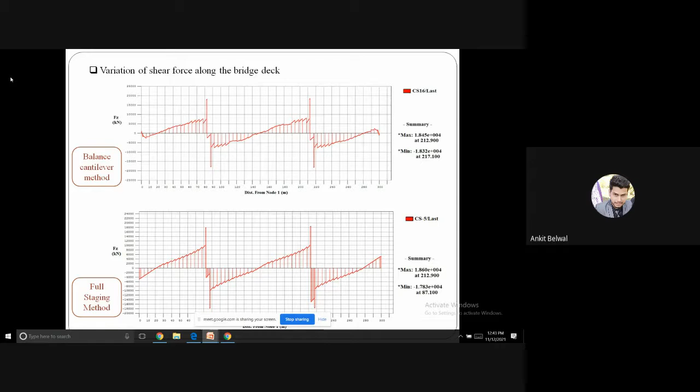But we can also see that in case of balanced cantilever method, axial forces are higher near the piers and have lesser values in the middle of the spans. But in case of full staging method, the axial force values are basically constant throughout the bridge deck and have maximum values near the piers.

Now, to conclude my presentation, from the results we have seen that the maximum values of bending moment are more in case of full staging method of construction, about 5 times the value in case of balanced cantilever method. The negative bending moment is also more for full staging method of construction. Such difference may have arisen due to the less efficient consideration of the effect of time-dependent material properties in case of full staging.

The values of shear force along the full bridge span are less in the case of balanced cantilever method, but there's not much significant difference in both the values. Axial forces are more effectively distributed in case of balanced cantilever method, but have maximum values greater than full staging method.

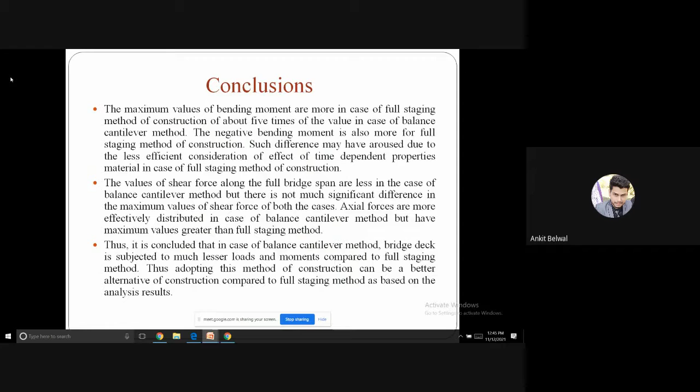Thus, it can be concluded that the bridge deck is subjected to much lesser loads and moments in case of balanced cantilever method comparing to full staging method. Thus, adopting this method of construction can be a better alternative compared to full staging method, based on the analysis results. With this, I will conclude my presentation. Thank you all for the attention.